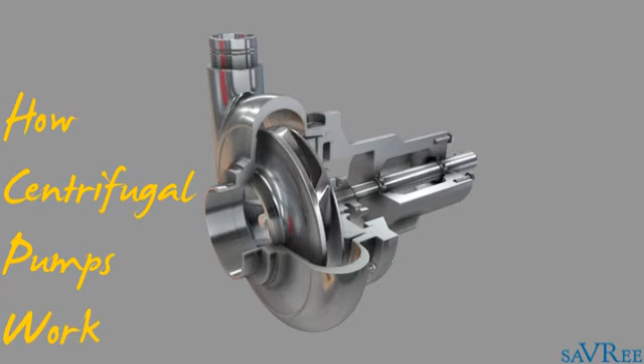In this video we're going to look at the centrifugal pump and I'm going to explain to you how it works. So let's dive in. Let's do a little spin. Here is the exterior view of the pump again. And if we spin around the other side, we've got a cross section.

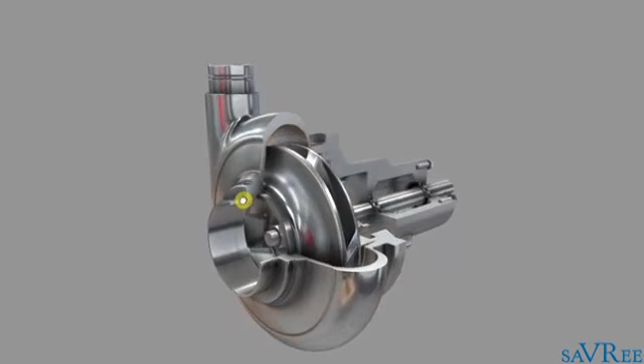Now I'm not going to go through the terminology and the components because we've covered that in another video. But let's just go through the components that we actually need to talk about. And the components are the impeller and the volute casing.

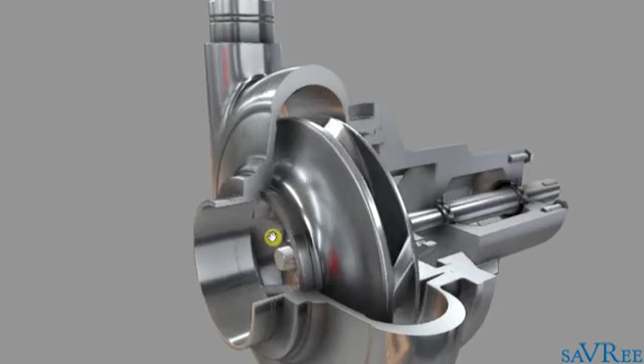So how is it that the centrifugal pump works? You can see from the design and the animation that the pump's construction is quite simple. Essentially, we've got an impeller rotating within a volute casing. And as it rotates through the liquid, we're creating pressure, and this pressure differential, that is the difference between the suction side of the pump and the discharge side of the pump, is what causes the liquid to flow.

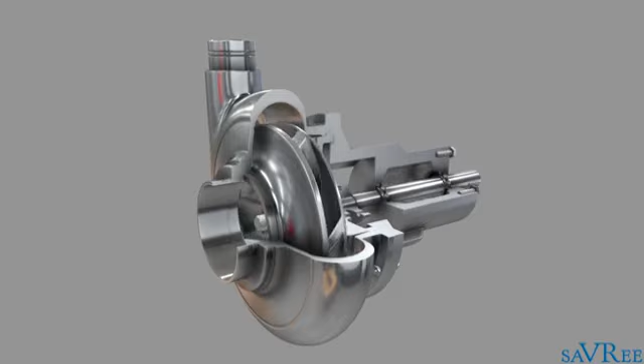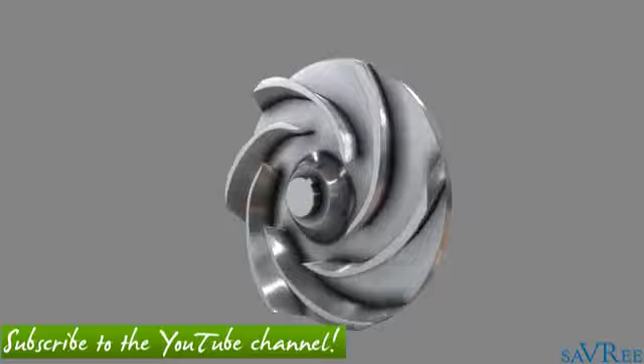Well, in order to understand how the centrifugal pump works, we need to have a very quick look at some of the theory. So let's first pull up an open centrifugal pump impeller. So here we are, we're now looking at a centrifugal semi-open type impeller. The type we saw earlier was the enclosed type, and this one is a semi-open type or the semi-closed, depending on how you want to look at it.

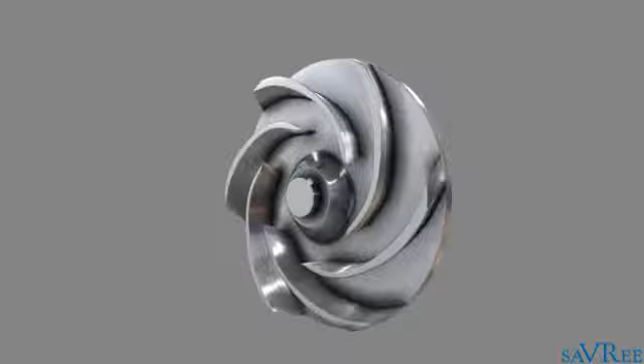As you can see, it is rotating in a clockwise direction. I'll give it a little spin. And we can see also that there's a shaft in the middle of the impeller and a shaft key which connects the shaft to the impeller itself. The suction side of the impeller is this middle area here. That's what we call the eye of the impeller.

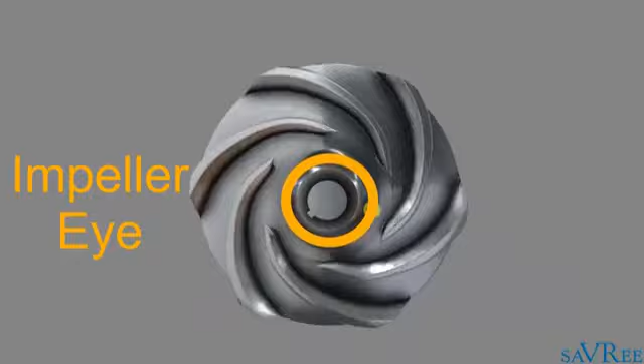And as we draw the liquid in, we're going to create a negative pressure at the eye of the impeller. And then we're going to throw the liquid outwards radially away from the center of the impeller towards the outer periphery of the impeller.

The reason the liquid is thrown outwards radially away from the center eye of the impeller is because of the friction between the impeller and the liquid. As the impeller moves, some of this movement is imparted onto the liquid. And because the impeller is rotating from a center axis, the liquid has a tendency to be thrown outwards away from the eye of the impeller.

Now the force that causes this is known as centrifugal force. And because this type of pump uses centrifugal force, it's called a centrifugal pump. If you've ever driven around a corner very fast in your car, you'll know that if you're turning into the left, you have a tendency to be thrown outwards to the right. And this is centrifugal force.

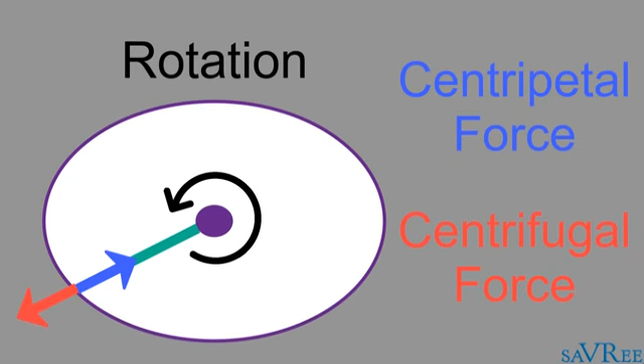Now the impeller does the same job, although on a much smaller scale. It rotates very fast from a center axis of rotation, and the liquid that is drawn into the center is thrown outwards to the side, radially away from the eye of the impeller. This centrifugal force gives us a large increase in velocity, which we can later turn into pressure.

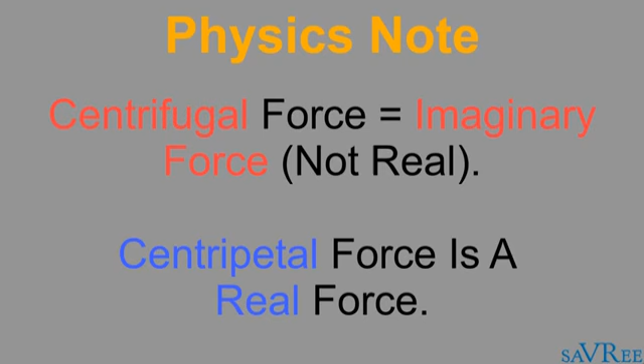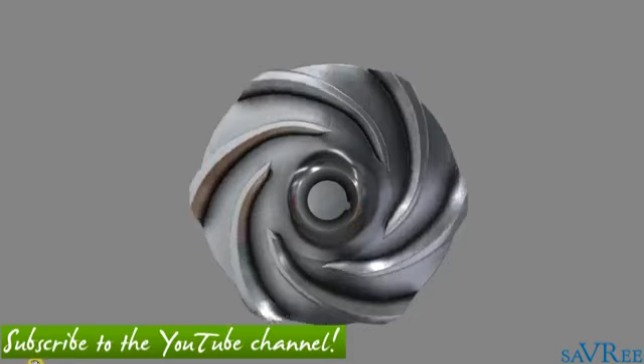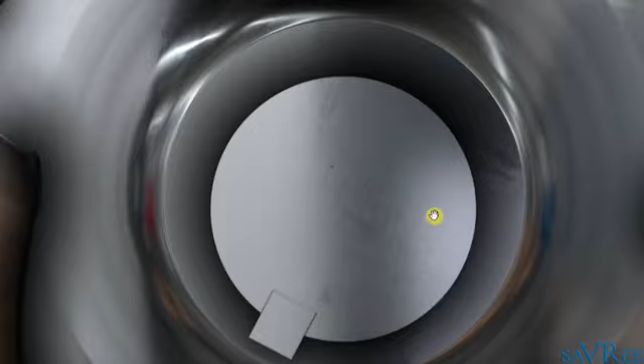So let's just pause the animation and I can show you the flow path of the liquid. So the animation is now paused. Zoom in. In fact, let's just do it as the liquid would flow. We would flow into the middle like so. The liquid is then thrown outwards radially and it's going to go between a pair of vanes.

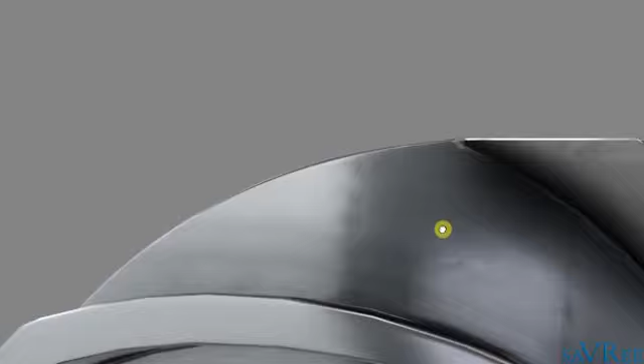And then it's going to flow up along here, it's going to be thrown outwards and then it's going to leave the impeller. So let's do it this time, but we'll just add some arrows to mark the flow. So as you can see, the liquid would flow out radially, and as it flows out through the channels, the flow path area is going to gradually increase. And as it increases, we're going to get a reduction in velocity and an increase in pressure.

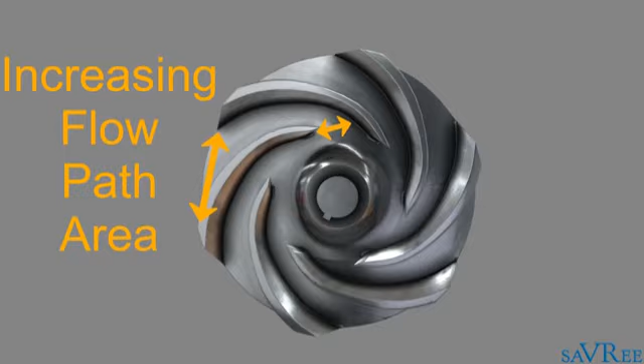So that is essentially what the centrifugal impeller is doing. It's converting velocity into pressure. And that's what we need in order that we can get flow. But let's now have a look at the theory behind this, and the theory behind it is known as Bernoulli's principle.

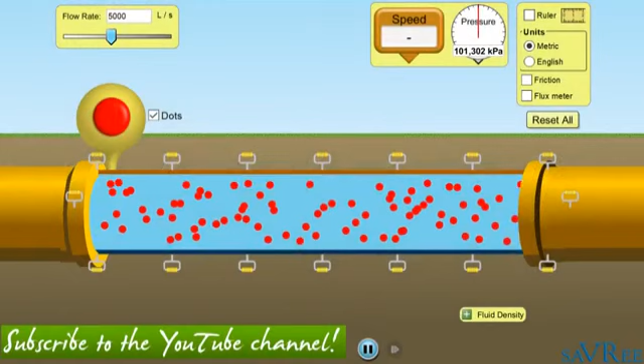Okay, so here we are. This is our Bernoulli principle simulator. You can see we've got an underground pipe. We can assume this is going to be an underground water pipe. I'm going to turn the dots off, but you can see that the flow is from left to right.

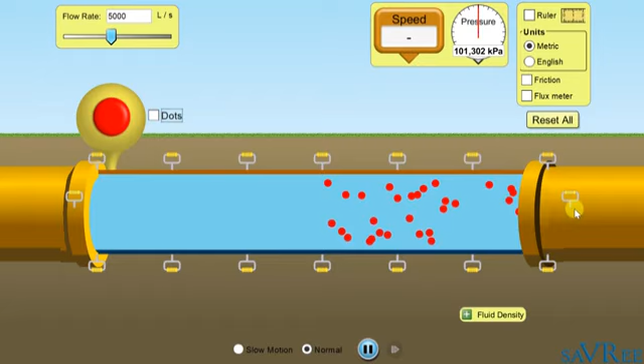And if we take our speed gauge, we can put a speed gauge on the pipe, another speed gauge here, and, in fact I'll raise these up just ever so slightly, we can see that at these 2 points the flow is constant and the speed remains the same irrespective of where we put our speed gauges. We can do it like this. And this makes sense because we've got a constant flow.

Now this constant flow is required in order to apply Bernoulli's principle. Bernoulli's principle states that if we have a constant flow and we change the flow path area, then we get a corresponding change in pressure and velocity. So let's put the theory to the test.

I'll take my pressure gauge and I'm going to install it. In fact, we can install it roughly here, so it's slightly in front of the speed gauge in relationship to the flow. And I'll take my pressure gauge and I'll try and do roughly the same thing again. See, it's a bit further down here. And there we go. We've got the exact same pressure and the exact same speed.

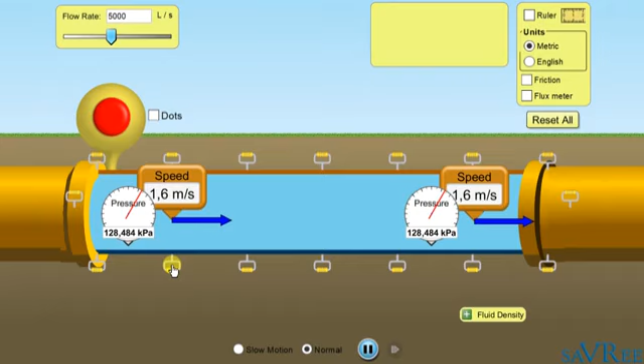So Bernoulli's principle states that if the flow is constant and we adjust the flow path area, then we'll get a change in speed and pressure. So I'll extend the pipe and I'll make the pipe a little bit bigger in diameter. And we can see already the speed has dropped. It's now 0.7 meters per second instead of 1.6. And the pressure has increased.

Can do it also here. Again, the speed has dropped, 0.4 meters per second, and the pressure has increased again. So we know that if we increase the flow path area, we get a reduction in speed and an increase in pressure. And that's what Bernoulli's principle states.

If we go the opposite way, we can try and make the flow path here slightly smaller. In fact, I have to extend it a little bit because otherwise we don't get our pressure reading. And we can see that the speed on the left is 0.4 meters per second, but the speed on the right has increased. Let's just take this handle, reduce it.

And now we can really see that if we create a massive restriction in the pipeline, then we get a huge reduction in pressure and a massive increase in speed. You can see here our speed is, or was, about 5.6, 5.7 meters per second.

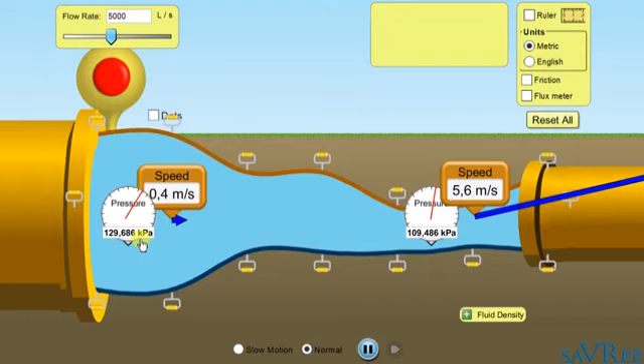So a quick recap. If the flow path becomes larger, the speed reduces and the pressure increases. If the flow path becomes smaller, the speed increases and the pressure reduces. And you can see we've got quite a lot of pressure reduction when we compare both the left and the right. So let's now go back to our impeller and apply Bernoulli's principle in order to figure out how it works.

So here is our impeller again, and we can see that the flow path area increases as the flow flows out radially away from the center of the impeller, and we know now that this increase in flow path is going to cause a reduction in velocity and an increase in pressure. And that is essentially how a centrifugal pump works.

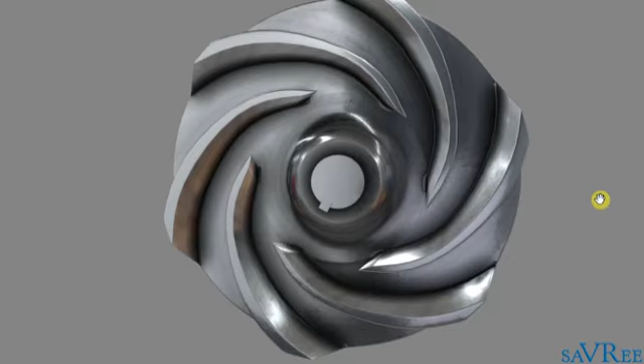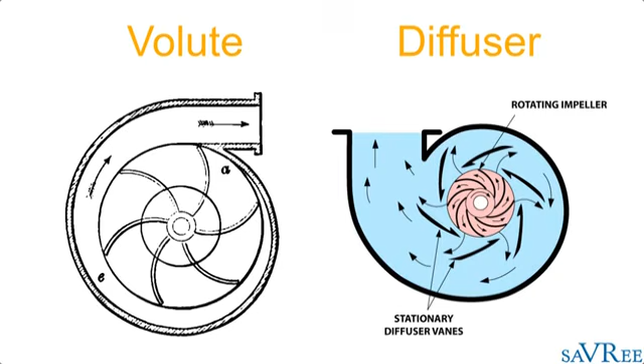Now after the impeller, usually there'll be a volute casing or a diffuser, but the concept behind the design of the volute casing and diffuser is the same as for the impeller. We know that we need to increase the flow path area in order to increase the pressure. And as you can see on the diagram now, the volute casing does just that.

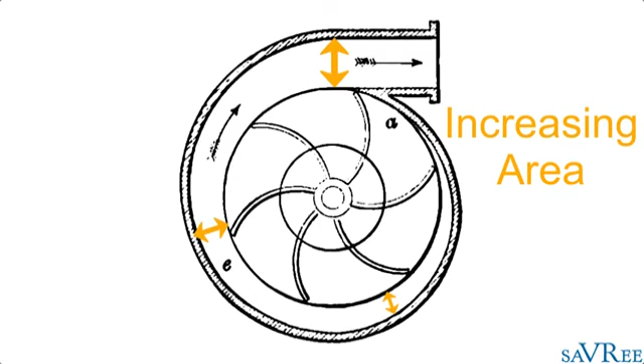As the liquid is discharged from the impeller, it's going to flow around the volute casing and we're going to get a reduction in velocity and an increase in pressure. And that is essentially how a centrifugal pump works. There really is nothing more to it. So let's go back to our main centrifugal pump model and we'll do a very quick recap.

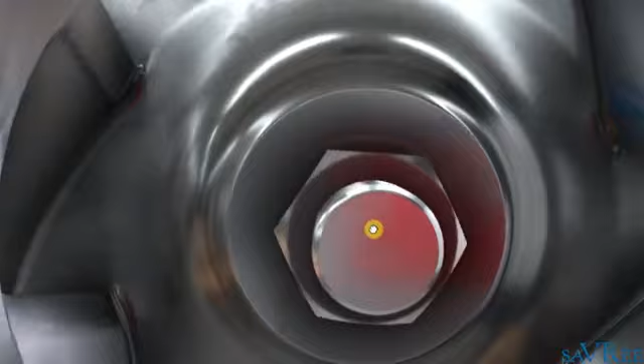So here we are, we're looking at our centrifugal pump. Let's imagine we are the flow. The centrifugal pump impeller is spinning, we're going to be drawn into the impeller eye because it's creating a negative pressure. So we've been drawn into the impeller eye. We're now going to flow out of the vanes. We can see the vanes just on the inside of the impeller.

I'll see if I can actually get through the vanes. It's going to be quite tricky because the whole thing's pretty tight. So we're flowing through here, through, further, further, further. We're being thrown out radially, and then we're going to exit the impeller and go to the volute casing. Now we're inside of the volute casing,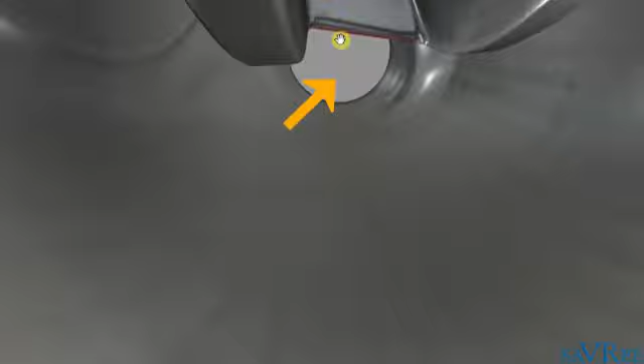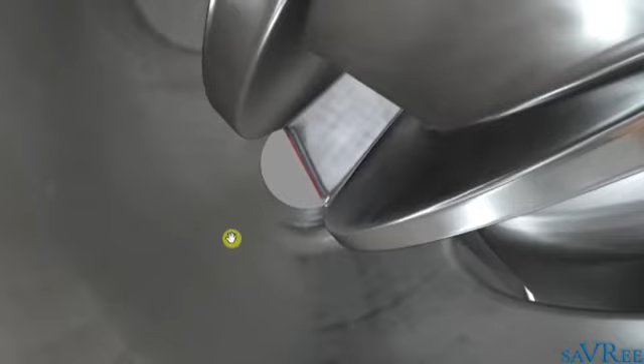and look, as we are thrown out of the impeller, we enter the volute casing and notice how much more space there is as we move towards the discharge pipe. That's this pipe that we can view at the top of the screen, compared to how much space there is on the opposite side. You can see it's getting continually narrower if we wanted to flow back the other way. So down this side here is quite narrow, but the diameter of the volute casing is gradually increasing until we get onto this side here.

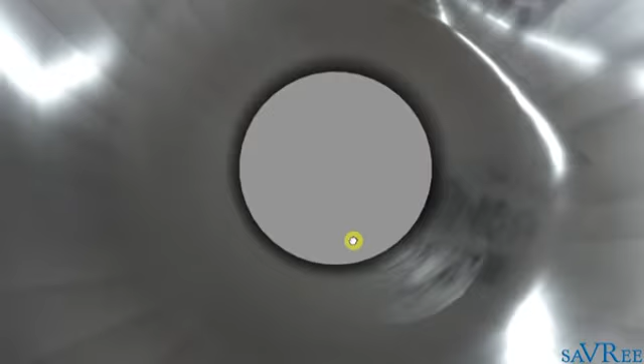And that means our flow path is gradually getting bigger, and all of a sudden we've got loads of space, and that means the velocity is decreased and the pressure is increased, and then we can move on our way through the rest of the system. So that's it. That is how the centrifugal pump works.